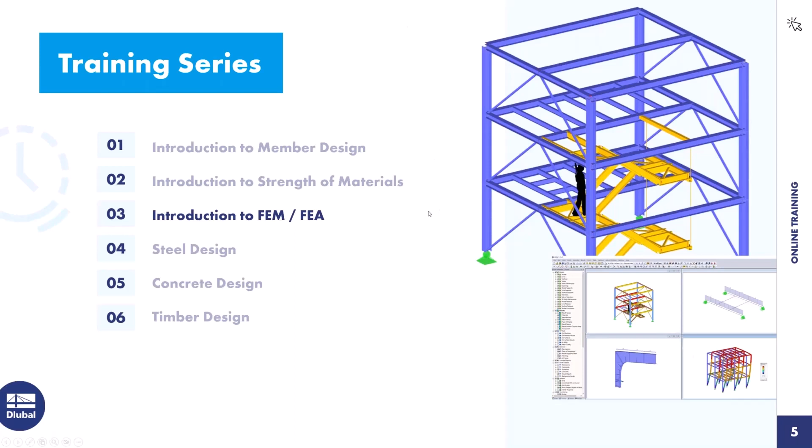In today's presentation or training, we will go through several different topics. First, I will just introduce you to the basic principles of the finite element analysis - a few slides on the basic principles so you can remember the stuff you may have already learned in your studies, and have a better background knowledge on the stuff we will do right here.

The next point will be just an introductory example with a continuous slab, followed by, again, just a short theory on the plate mechanics and the plate calculation theories.

With the last two topics, we will go on to the nonlinear calculations, so the more complex stuff. Not really hard into theory, but we will show you what RFEM is capable of. And the last thing we will inspect will be the singularities - one kind of big problem in the finite element analysis. And we will try to figure out how to solve them or at least minimize them.

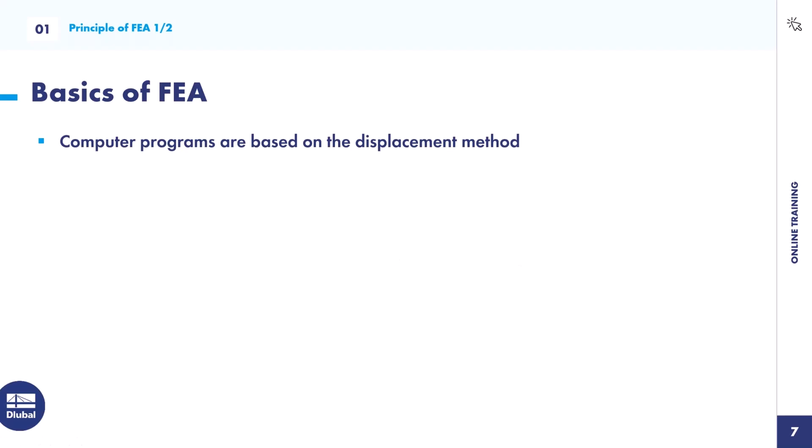The finite element analysis is used when analytical solutions of structures are not really possible. That means the finite element analysis uses a decomposition of the structure into finite elements. So it splits up the model into several squares or triangles, and on each square or triangle it describes the continuum.

This means at each border from one element to another element, you have, for example, a displacement in z direction, and it must be equal. So you have some equations which have to be satisfied. And for inside the element, we have approximations. So there are different approximations and several programs can use different approximations.

Also, there's the difference between linear approximations or third order approximations, which would be a more exact calculation, but also result in more demanding computer power. The next thing would be the discretization. This is an important term in the finite element analysis. The discretization means that the structure itself is decomposed into these finite elements, into these small elements.

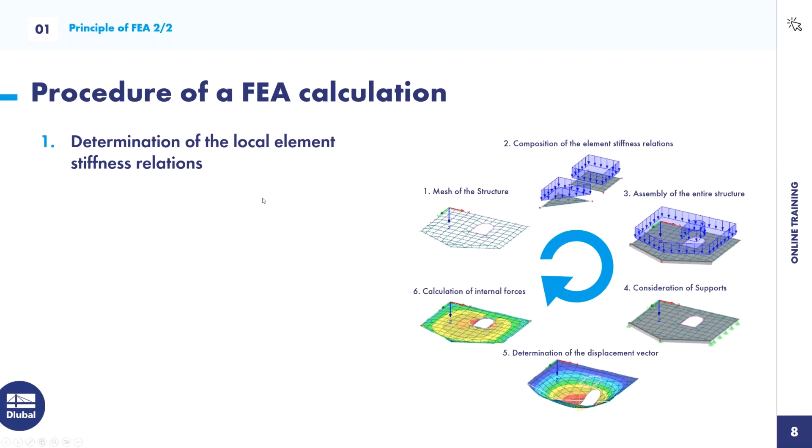And to make it a bit more clear, we have it also in a sketch where I will explain in 6 easy steps how a finite element analysis calculation is carried out. So the first step would be the discretization. That means we would split up the model, in this case a slab with an opening, into its small elements, and then in the second step we would construct the relations of each element. So the stiffness of each element, we would describe it with these approximation functions inside the program and have our stiffness matrix for every single element.

To continue and find the final result, we have to transform these local stiffness matrices. That means we have to transform them into the global coordinate system, and then we can put them all together. So we put several matrices together and create a complete stiffness matrix for our system. This is right here, the third step in our calculation.

In the next step, we would consider supports and loads. The finite element equation is relatively simple. It's the stiffness matrix K times the displacement vector U, and it equals the force vector F. So with step 3, we got the stiffness matrix K. With step 4 now, we will get our force vector F. And by considering the support conditions, we can also block or strike out some of the equations, since in the displacement vector we just set some displacements, for example, to 0.

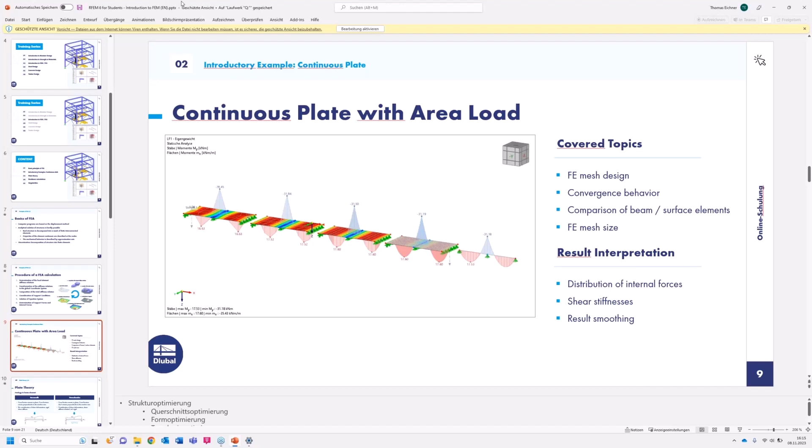And what we will do is we will create a continuous slab, and we will adjust the mesh size for the same slab, and we're gonna inspect how the mesh size will influence our results. Also, we will compare it to a simple beam, just one of the easiest structural systems. We will investigate and inspect the problems of the mesh size.

So now RFEM should be ready. Not quite yet. But okay. In the meantime, we can also do just another poll.

I prepared one according to the discretization. Let's go. What did I mean with the discretization in the finite element analysis? Okay, perfect. I will close the poll. And the result, it's quite surprising. I never had this before. So 100% of you were right. It's the decomposition of the structure into small finite elements. Perfect.

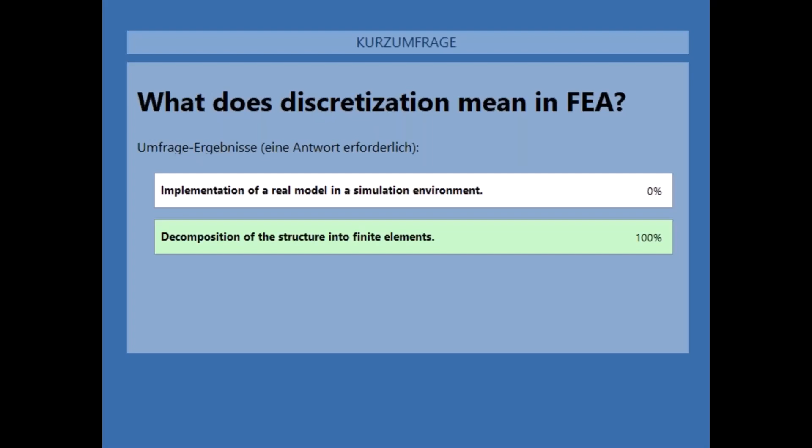Okay, seems like I had some pushover model open from my dynamic development. These are rather complex systems, and it could result in some loading time.

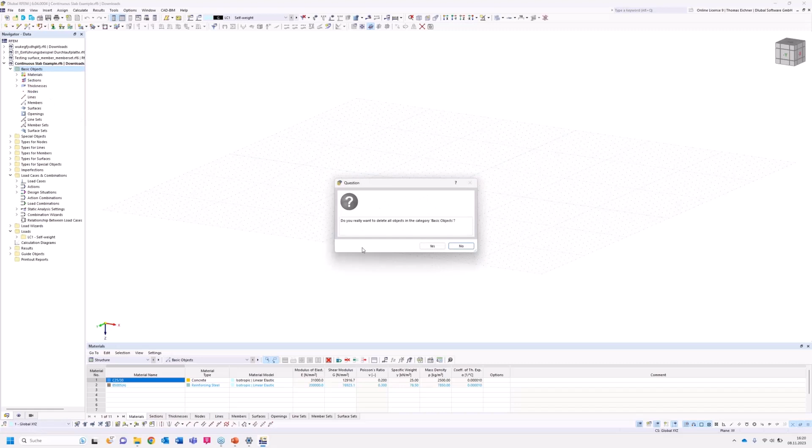Since we want to start from 0 today, and the basic program option is to use the materials, sections, and thicknesses from our last model, so we don't have to create them each time completely new, we're gonna just delete all the previous basic objects. And that's done right here at delete all basic objects.

So now we are at our free model, and we can either go over this view cube, or we can use these 4 buttons to change our view on the system. We will want to look in Z direction from above. That means we will press this Z direction button, and then we are ready to go.

We will start by creating a new rectangular surface. It's this button here on top. If you ever used something else, for example, a triangle surface, the triangle button will appear on top. That's just the last used modeling option. So we will go on to use this rectangular surface button.

Right here, we can go on and create our thickness. Just for your knowledge, if we don't have a thickness and try to press OK, it will warn us that we have to create a thickness. So the program won't let you do complete nonsense. It's gonna help you on each step of your modeling process. Now we're gonna click here, and it's gonna automatically start the dialog for the thickness.

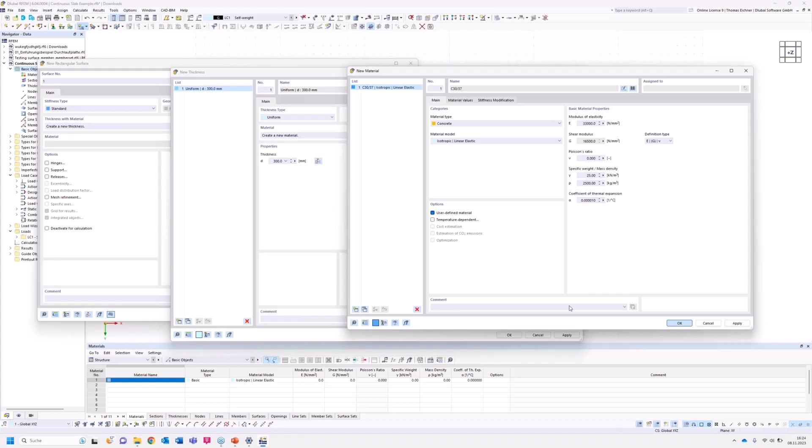After we did it, we have our material done. We can apply it with the OK button. We have our thickness done. We can apply it with the OK button. And then we can start by clicking the OK button again on modeling our first surface. The first surface will be about 10 times 5 meter. I have here my grid points to help me out, and I can just create this first surface.

The next point is we want to do a continuous slab. Means we want to have a support on the left side, on the right side, and in the middle of our plate. To create the support in the middle, we also have to add another line. We're going to use the new line function on the top right and just go from one middle to the other middle. The system automatically shows us where the middle point of a line or a slab is. So this makes it quite easy.

After we did it, we can go out with right click or apply it with right click, and then we just had to close our dialog box. Now we have our first system. We have the stiffness matrix already done in here, like in the K times U equals F equation. We already have the K done.

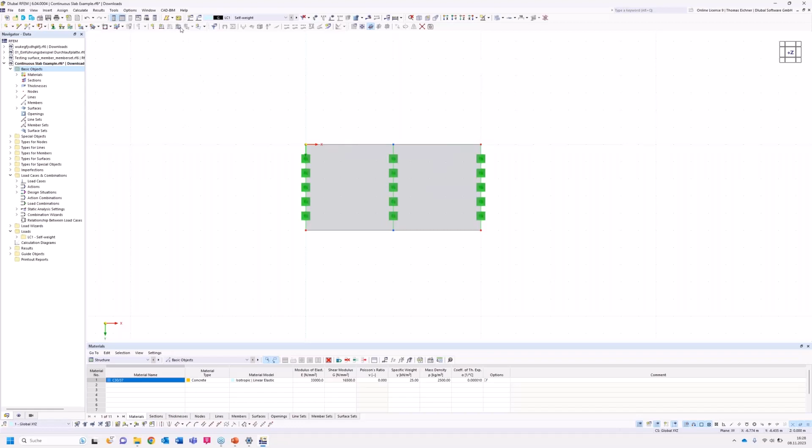And the last part would be the force vector. So for the force vector, we're going to make it simple and just apply an area load of 10 kilonewtons per square meter. We just have one load case, so we don't have to think about it right now. And we then can assign it here. We could just enter surface 1, since we only have one surface. We could select it, or we could just leave this empty, click OK, and select it afterwards.

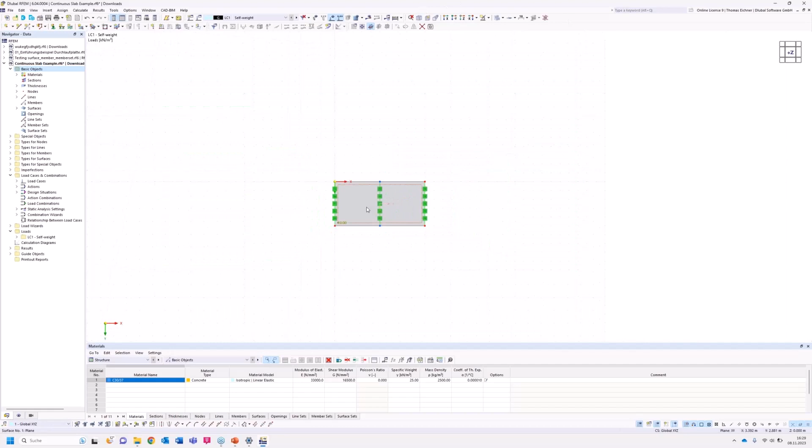After applying it, we're gonna inspect the appearance of the load. So back in the view from the top, we can see the system. And in the next step, we can just select everything we did and use this button here. This means it moves or copies the selected objects. In this mask, we already see on the right-hand side what will happen. The selected one will just be copied or moved to another place.

So we want to have 4 plates. So we create 3 copies of the system, and we will move them 10 meters. Right, 15 meters. Our system is 10 meters long, and so we want to have 5 meters space in between, and then we want to have the next system. So we will have 3 copies with 15 meters. After doing it, we will have them right here.

And now we see our helping grid is not helping anymore on the last surface, but I need it for the beam, or I don't need it, but it helps me a lot. So we will go into settings for our work plane and grid, and we will just adjust the number of grid points. I will just take way too many, like 200, and I will also adjust the grid spacing from 1 meter to 0.5 meter. It's not really needed, but it's possible, so I will just do it.

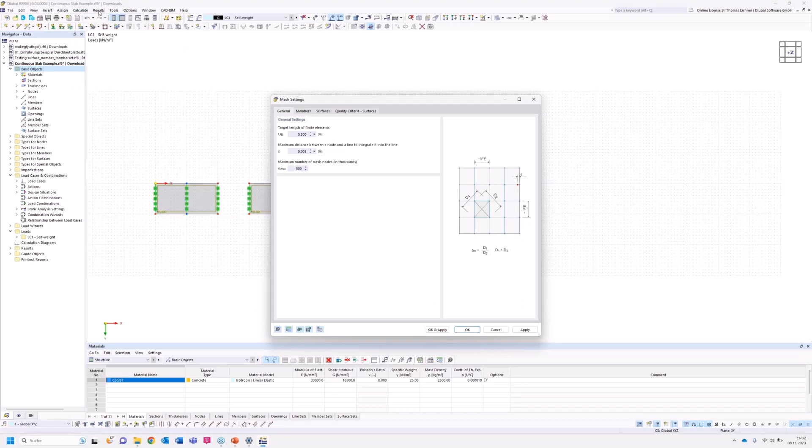With OK, we can see the result. We have now a new grid, and it's over the whole system we want to go through and inspect the results on. So the next thing we want to do before we model the beam would be the mesh size. Right now we don't have any specific mesh size for a surface. That means if we calculate it right now, it will just use the general mesh settings, which means our mesh size would be 0.5 meters on every surface.

Well, since we want to inspect it in way more detail and have different mesh sizes, we will help ourselves with something called surface mesh refinement. Like said in the name, surface mesh refinement seems to be a property of a surface. And our data navigator on the left side is built up very simply. There are basic objects, some special objects, then the properties of our basic objects, properties of our special objects, something about the loading. So in general, in the data navigator, you could find each function you also find in the buttons on top. But the buttons on top just help you to be way faster.

But right now we will go for the surface mesh refinement, right here: types for surfaces, surface mesh refinements, and use them. With double click, we can open the dialog and see the first one. In most dialogs, we also have a picture of what is happening within this dialog.

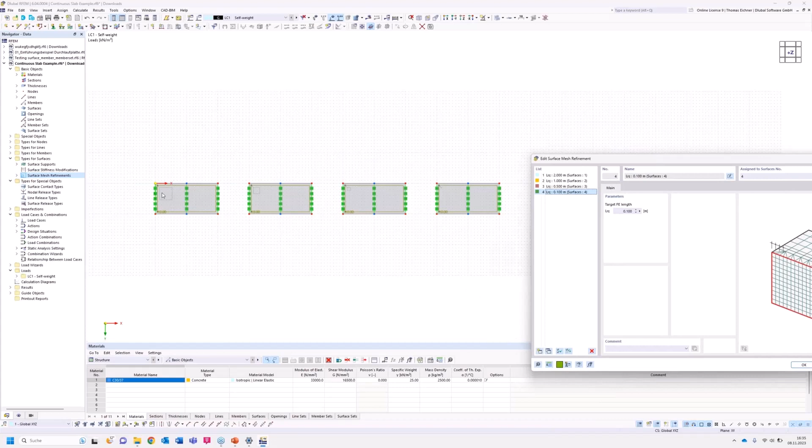Now, after finishing the 4th one, we didn't apply it yet. We can either apply it right here, so now we can see something. I will explain it in a bit. But the positive thing about the apply button is we stay in the dialog. So if we had more surfaces and wanted more mesh refinements, we could just go on and create new ones. If you click OK, the dialog will be closed and it will be applied. That would be possible for our case as well.

And now we can also see these squares in our surfaces. Those show us how the mesh size will be. This will be very coarse and this will be extremely fine. You could estimate this will be roughly 1,000 more elements than the first one. That means maybe not 1,000 times more calculation time, but let's say 5 times the calculation time. It's just an estimation.

For the comparison, we will also create our beam. The beam will be done with this button on the top left side. This section will be a new one since we have none yet, so we go into create new section. We want the only material we have already, the C30/37. And we want exactly this rectangular object. The rest here doesn't really matter for us right now. I will go on to something later on, but we could also inspect the section properties.

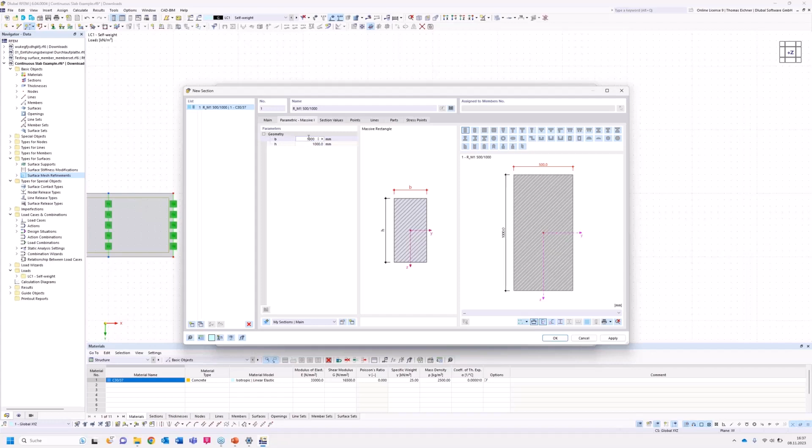To adjust the size of our rectangle, we can go to this parametric massive section. Here we want a width of 1 meter, so 1,000 millimeters, and a height of 30 centimeters. We make it 1 meter since the internal forces of plates are always, one second, I don't want to say something wrong, kilonewton meter per meter. So it's always for 1 meter. To have the same results for the beam as well as for the plate, we need 1 meter in the width. We can press OK and OK and go on with the modeling.

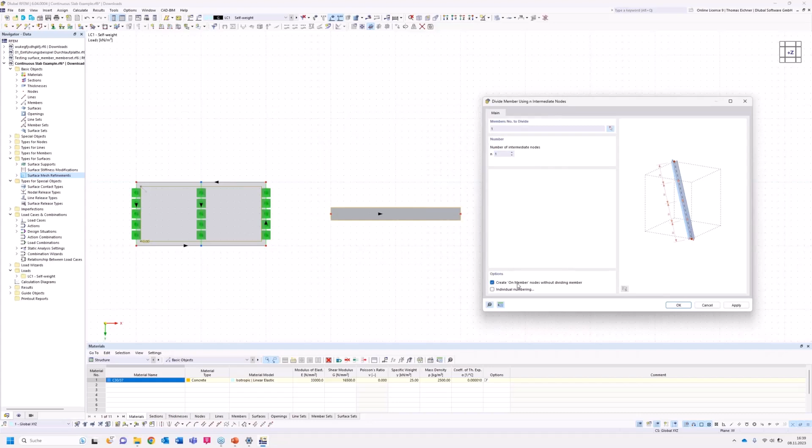Now we will create this 10-meter slab, well, not slab, but our beam. This beam will be divided since we need a support in the middle. We go on this member, divide member with intermediate nodes. I could also go by distance with 5 meters, but we will take the simpler method: one intermediate node, very easy. We will also use a new function here, create on-member node. I'm just clicking it and pressing OK. Now you see this blue new node.

The special thing about on-member nodes is we didn't divide the member. This is 1 member. If we didn't check this function, it would be 2 members now. It's just for more complex systems. You don't want hundreds of thousands of beams just because you have beams coming into other beams and so on. For our purpose, this doesn't really matter and we could go for both options. Now we have this beam. We have our K matrix again.

We can go for nodal supports now and add some supports to the system. One problem here is that we could use the predefined hinged one, but on the predefined hinged one there's 1 degree of freedom which we need to block for beams, and it's the torsion, the rotation about its own axis. If we didn't do it, it could just rotate and fall over.

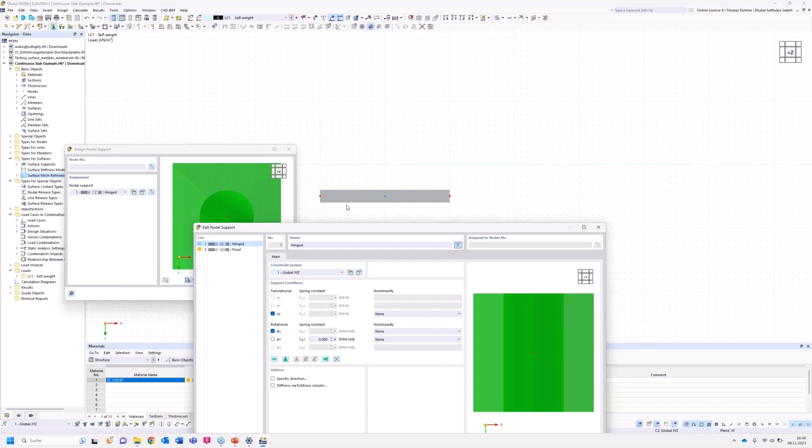So after doing this, we have it adjusted right here, press OK, and assign them to all the nodes. Last but not least, we can just add our member load, again with 10 kilonewtons, this time per meter. Press on the slab, again not the slab but the beam, and we're ready to look at this in 3D, since it looks quite cool now. Just a few simple steps and we have our systems.

One more thing, we can also do this for loads. We can adjust their size. And yeah, so before the calculation, I want to do 2 more things. That will be, again, view in its Z direction. And now we will create our, where is it? Our result section.

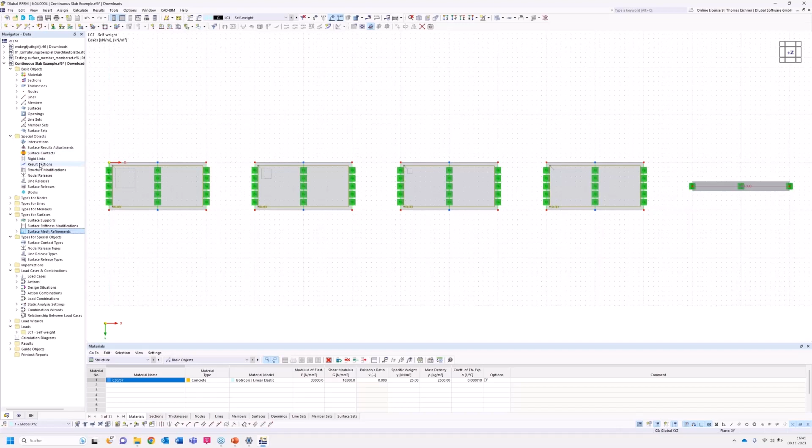Result section is a special object, so we find it in the special objects. Result section, we double click it, and we just use the basic settings and take our first 2 nodes from here, from the middle left to the middle right. Okay, we will press OK. Now we can see we have added this result section.

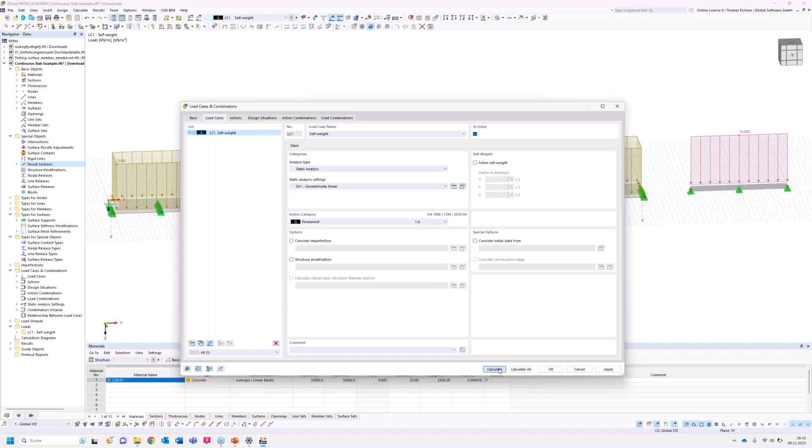Now for better investigation of our loads or of our results, we will also deactivate the self-weight. So we go into the load case and deactivate the self-weight. Now we're done and ready to calculate the system. So we have our results now. We have our results also on the result sections.

We can adjust our values to be displayed right here at the values on surfaces. And that seems to be wrong. We have to go result sections, values on result sections. There we can go on local extremes. And that means we just have our results. Now we can see the different shapes and we can compare the deformations.

We can see we have here 0.34 millimeters. And we have here on our comparison beam 0.46. So there's a big discrepancy between this coarse model and our beam. This 0.464 seems to be really accurate, but also our not so fine mesh did result in comparable deformations.

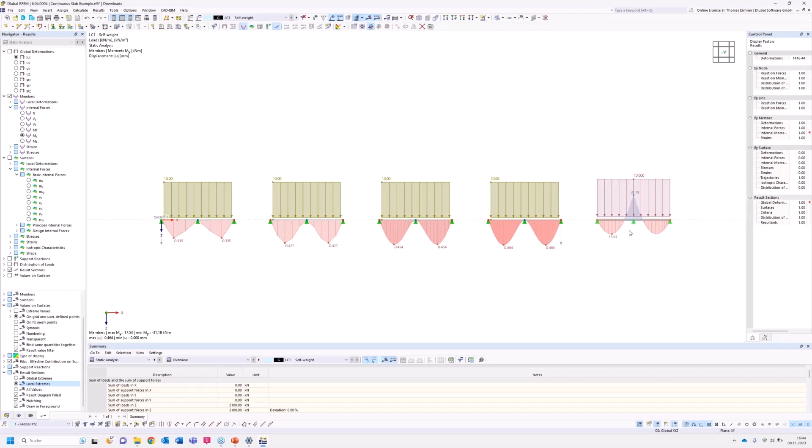We'll also investigate this on the internal forces. So we go on the members, the internal forces, and we will look at the moment about the Y direction. This is the moment rotating about the Y direction for beams. For surfaces, it won't be the My. The My should be 0, but we will go for the Mx. Why is it now the Mx and not the My?

For surfaces, there's a different definition for internal forces. Mx means now we will follow the x-axis. We will cut the slab with a plane perpendicular to the x-axis, and then we will rotate around the corner of the cut. So it's a cut perpendicular to the x direction, and then we will rotate around it.

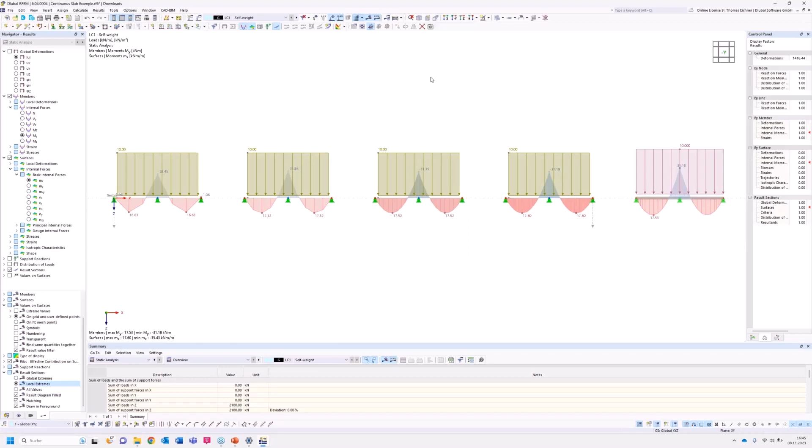Now we can look again into our result investigation. I will disable the loads for here. And now we can see, okay, there's a difference in those ones. Also, now I will go into the section result diagrams, right click on the section arrow, then go into result diagrams. And here we can see it already. Now I will, let's see.

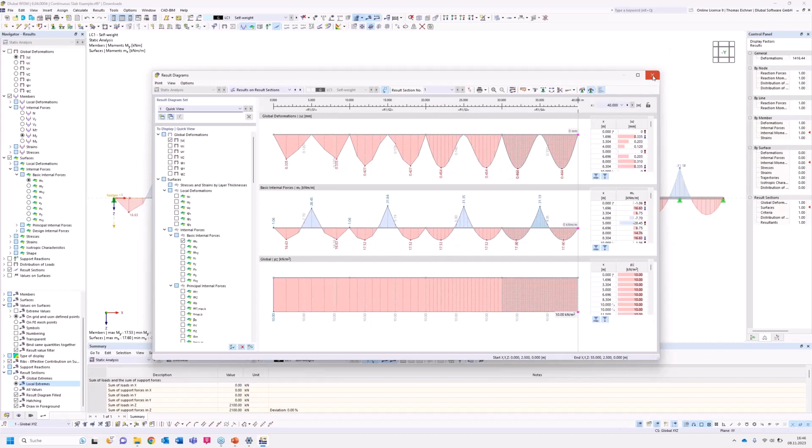What's now happening is that we have, I will show it in the general menu since I want to use the 3D. I will also disable the results for what I want to show you, since we can see now the mesh. The mesh seems to be fine for these right three types. But on the left side, we see it's not quite fitting in the system.

We have also a triangle. Just a hint, we want to avoid triangles. We can't avoid them always, but we want to avoid them. They won't lead to the best results. Not completely wrong results, but let's say not the best results.

And we also see we don't have an edge of elements now in the middle here. And for a single span beam, we would estimate the maximum moment in the middle. So for this system, let's go back into the results.

We can see that here is our maximum on the left side, but it's not exactly where it should be. So the mesh, if it's too coarse, doesn't only influence the exactness of the results, but also the location of maximums and minimums. And that's what needs to be avoided in any case.

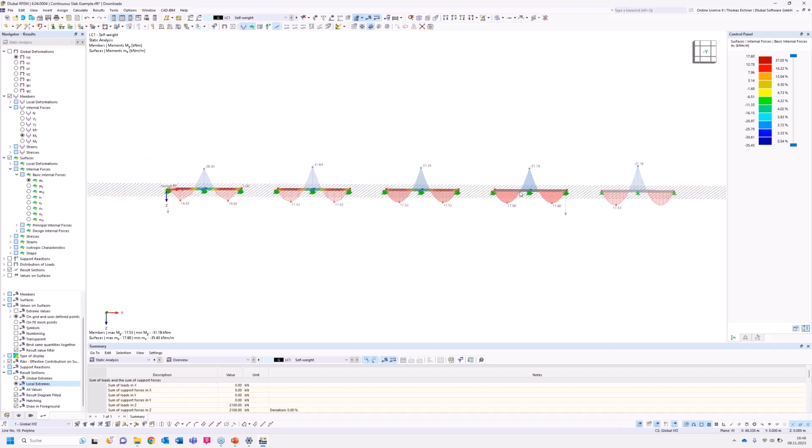So the next point would be which results seem fine. In this case, we will look at the top moment. We have almost the same results here. Seems fine, of course, since it's very fine. But the difference between this 31.35 and this 31.18 is not that much, so I would also take these results. These results I would take as well. They're really close, about 1% difference maybe.

But when I go into deformations again, it looks quite different, and that's why I would go for this system here. That leads to my rule of thumb, learned in my studies, for the use of mesh size.

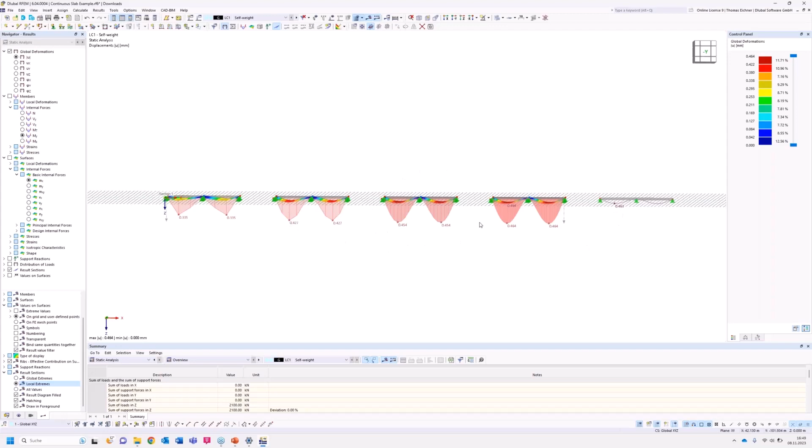So I'm going to show the mesh again. We have like 5 elements right here, and here we have quite more, way more. The rule of thumb I learned was 6 elements per length. So there needs to be 6 elements in the region we want to inspect.

That's for design. What I learned in this company is also that for bigger models, sometimes there's the possibility where you want to design parts of the model and use other parts just for load transfer. If parts of the model are just for load transfer, 4 elements are enough, maybe even 3. But however, this one should be avoided in any case.

Okay, so now we're finished with our first model already. And the next thing we will do would be some nonlinearity. So what I'm going to do at first is give you a short introduction into plate theory, and afterwards we will continue with this model with some nonlinearities.

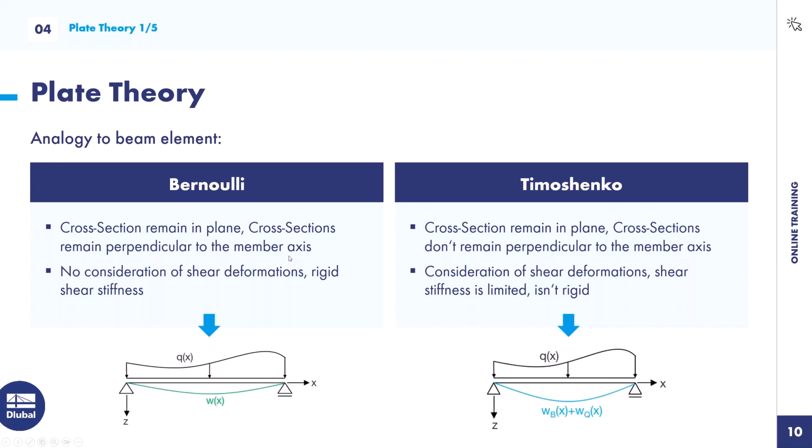For the plate theory, we have the analogy to the beam elements. For beam elements, we have on one hand the Bernoulli beam, on the other hand the Timoshenko beam. The simple difference is the Timoshenko beam also considers deformations from shear, so it isn't rigid. For the Bernoulli beam, the cross section remains in plane, same as for the Timoshenko beam, and the cross sections remain perpendicular to the member axis. This is not the case for the Timoshenko beam.

We can also look at it here. That means for Bernoulli, we have this middle axis perpendicular to the middle axis, the section cut. And for the Timoshenko beam, there's an additional shear angle, meaning the shear is also taken into account for the deformations. There's also kind of a rule: the bigger the beam, the better to use Timoshenko.

This can be used completely for the plate theory as well. We have the Kirchhoff plate theory and the more exact Reissner-Mindlin theory. We have for both systems the linear elastic material law from Hooke. We have geometrical linear and small deformations. We have that the cross sections remain flat and there won't appear any warping. We have a constant thickness. But for Kirchhoff, we don't consider the shear deformations, and for Reissner-Mindlin, we will consider the shear deformation.

For plates, we also consider the transversal and lateral strains. That was the Poisson's ratio in the program. We set it to 0 to have a better comparison to the beam element. We could have also just taken the Kirchhoff theory.

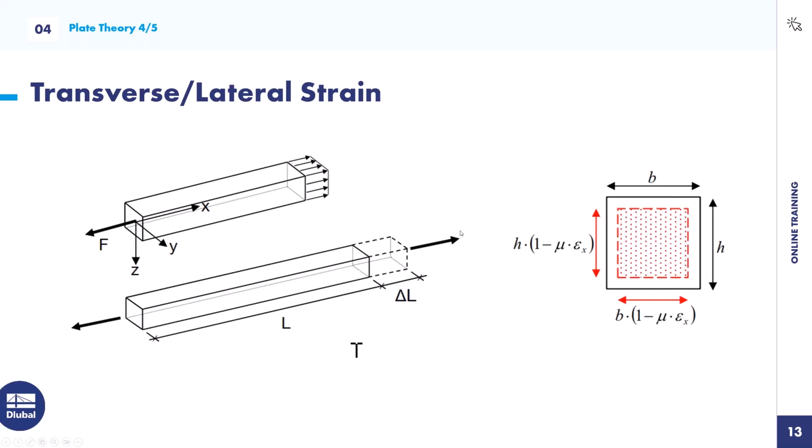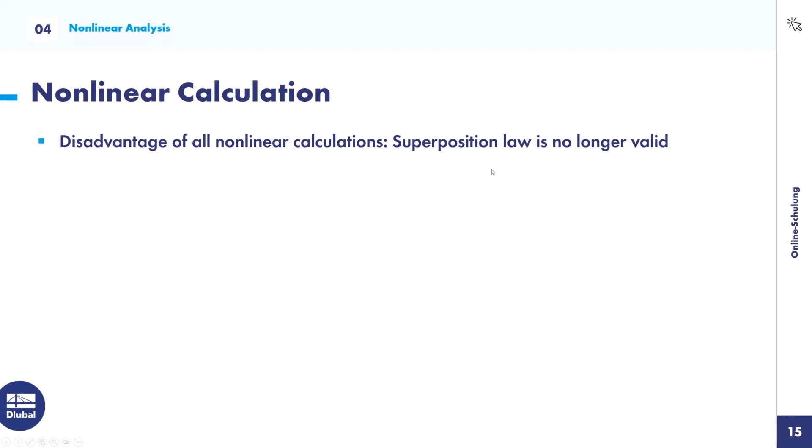Next point would be nonlinear calculation. Nonlinear calculation means something is nonlinear, right? The problem with nonlinear calculation is we can't superpose stuff. For example, in our early studies in statics or mechanics, we had just a dead load case and a live load case, and we just separately calculated them, then summed up the results and it's finished. This is not possible for nonlinear calculation.

The typical application areas in RFEM 6, or in general, are on one hand geometrical nonlinear calculation. In German it's first order and second order, and in English it's geometrically linear and p-delta calculation. There's also the theory of large deformations, which would be third order, but anyway we will go for this one.

So for second order, the program needs to do its first iteration of calculation. It calculates the system with its forces on top, calculates deformations, and then goes into a second iteration. It uses the deformed system, applies the loads again, and repeats the same process. This only stops if the added deformation is smaller than an error definition.

Okay, that's for the geometrically nonlinear stuff. Then there's also the nonlinear material behavior. Maybe you know nonlinear elastic material models. There are also plastic material models. And you can just imagine the superposition with a nonlinear material.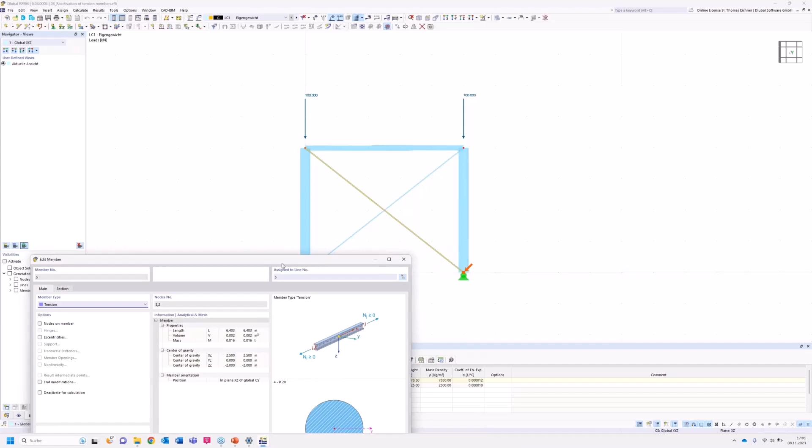So in our system, we have just this frame loaded with 2 times 100 kilonewton. And we can imagine what's going to happen right now. I will go for theory of first order first and calculate the system.

Theory first order won't have any horizontal forces, so as estimated it won't have any deformation in x direction, but it will just be pressured down. We can also see the color of these members: they got gray, which means they failed, they deactivated, so they're just not there anymore, you could say. For this theory first order, it was no problem since they are not even needed.

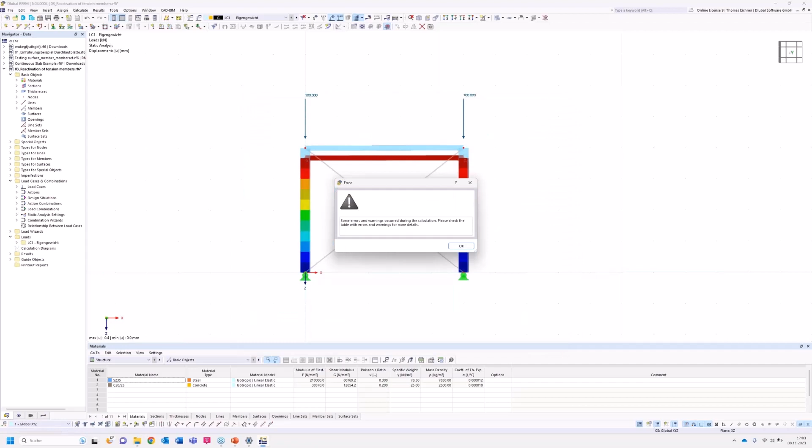Now we will switch to theory second order. I will just look into it, okay perfect, that's everything okay, and we will calculate it. So for theory second order, there will be some imperfections implemented in the program itself, meaning it will deform it a bit to the side and start the calculation.

Problem is, we now have an unstable structure. It's movable in the x direction. Why? Well, those both objects just failed. They got pressured and failed out.

In reality though, if the system goes down and then to the side, I'm not sure in which direction it will go, but let's say it would go to the left side. Then there will be a point where this member reactivates again and holds it back, right? And that's what I want to show you.

Even though there could be problems with stability, there can be a solution in our static analysis settings, and that means we could go for this reactivation tab. Exceptional handling, and then we will go for the failing members to be removed individually during successive iterations, so they can't fail at the same time in an iteration. We will go for it and calculate the system again.

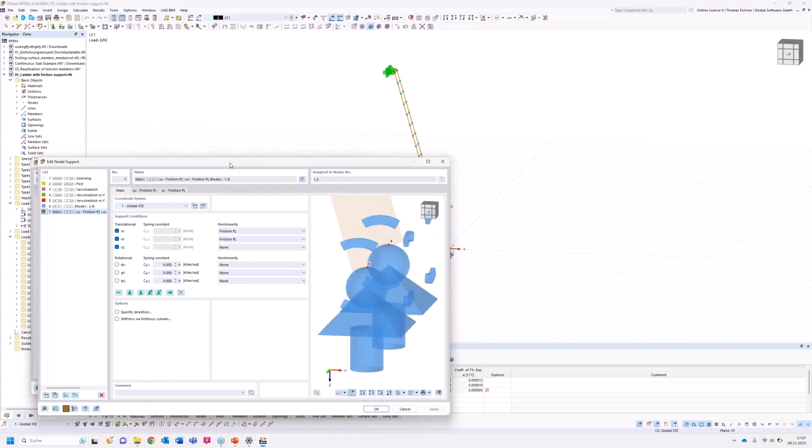Now we can see we have for this translational degree of freedom the friction entered. The friction appears here as a new one - could also go here, friction Pz, and it adds on top. We'll deactivate again and go into UX friction, which means in X direction it can take a force 20% as high as the PZ force.

So when we go into the system, we can see I create some load cases where a person of 1 kilonewton, so round about 100 kilograms, will go from the ladder to the top.

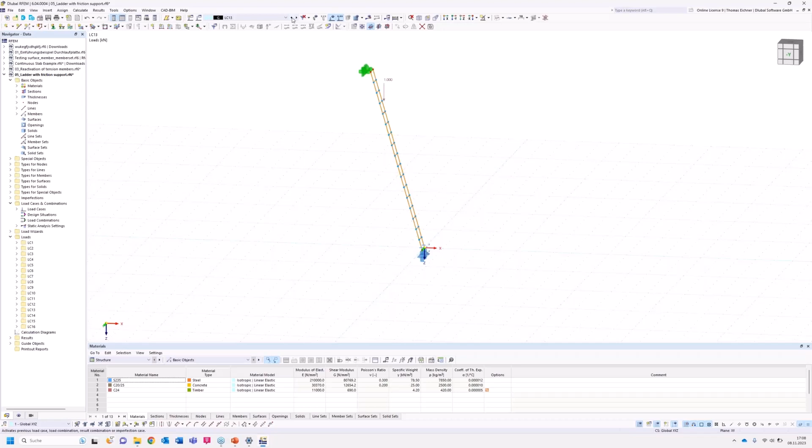Now we can calculate the system for a second, and I need to calculate all load cases here.

I will also show the support reactions. Now we can see the deformations of the ladder - they don't really matter for us right now. What matters is the support reactions.

We have here per support 0.5 kilonewton, meaning 20% of this 0.5 would be 0.1. So the support can take 0.1 kilonewton in X direction. Since the vertical force won't change, the limit value won't change.

But when we step up the ladder now, we can see this value rising. This results from the equilibrium of moments - as we go away from the start, the distance of this moment will be higher, and therefore this force will go higher. Way simplified.

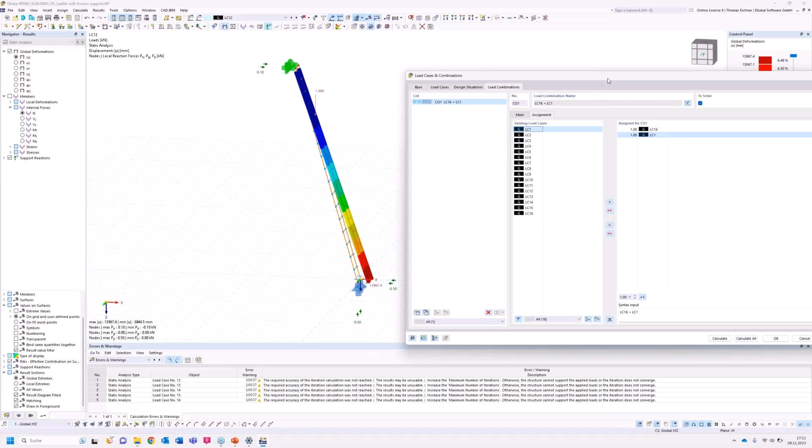So if the person is standing on the top ladder, I want to see why it is said that if someone stays on the bottom, on the last step here, or on the first step here, why is this helpful? That's something we can always also investigate. Therefore, I just need to, okay.

And now we calculated it and we can see, yeah, he can stand on top. Why? We have now double the force in vertical direction per support, meaning also double the allowable force due to friction. That's why it always helps when someone stays at the first step if the other one is going higher.

So then we can go into our next model.

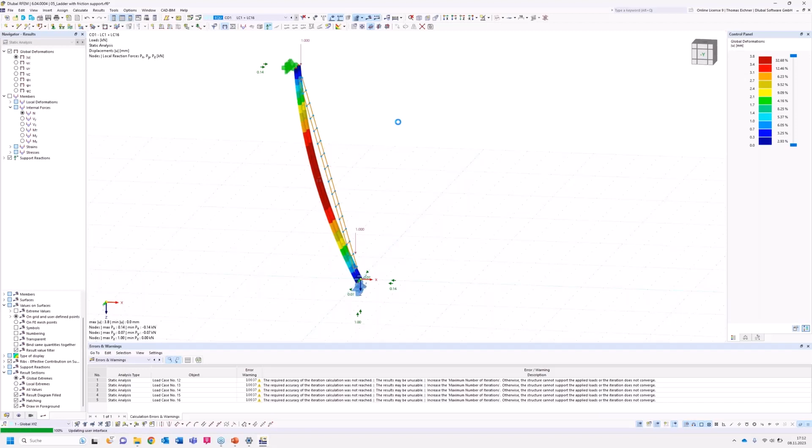And that would be our tension specimen. So we're in a testing bureau. We have, in this case, a surface, a steel surface. It's fixed on the one hand side. On the other hand side, we will pull it. We will just pull it.

Okay, now we're done. What I did here, we have steel 235. We have a thickness of, I think, 3 millimeters. We have a height here in between of 8 millimeters and here of 10 millimeters. That's why I created a force which results in exactly the yielding force for this section part, for this 8 millimeters height.

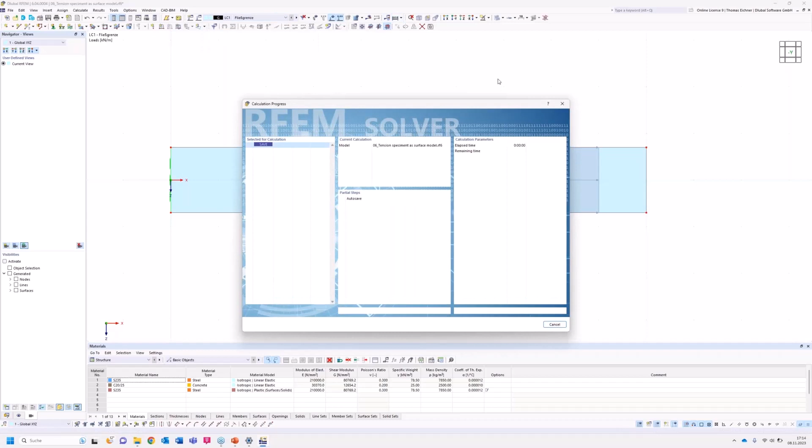So this 503.572 kilonewton per meter results in a stress of the surface of 235 Newton per square millimeters. So the limit of the system. I also created another load case where I just increased the load a bit, just a bit, but it should be more than 235 here then. And that's what we're gonna investigate now. Gonna calculate the system again.

Okay, now we have the results. At first, we're going to look at the deformations. You have here 0.1 millimeter, as well as for this increased load, we have 0.1 millimeters. Go back into this limit case. And now we will go into our equivalent stresses. Our equivalent stresses should be somewhere here. We will use the standard formulation in form of the equivalent von Mises stresses and show them.

Now we will see some colors. Okay, but we don't know what the color means here right now. Therefore, we go into our control panel. Now we can see the stresses and what each color means. So we see red and orange could be in this yielding region, about 235. But for some better investigation, we can also use user-defined values, and I will go just for the upper limit, 235.

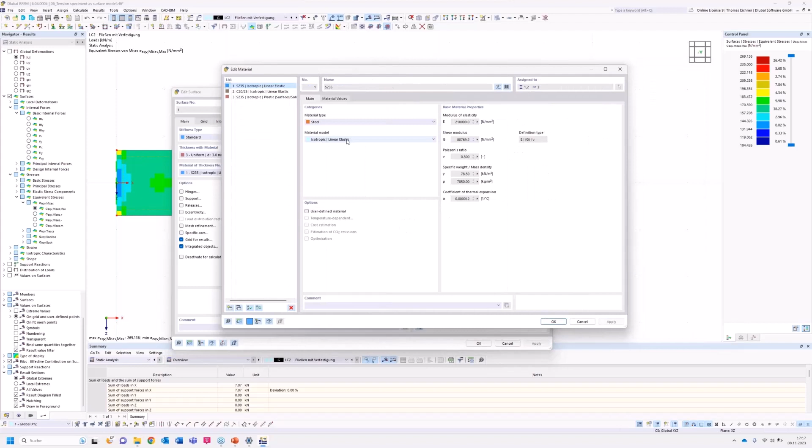And right now we will use the nonlinear material behavior. So I checked it already, and by checking it, it will be integrated in the program automatically. And that's the reason why we can pick here now a ton of new material models. In our case, we will go for plastic material model for surfaces, for example, isotropic plastic surfaces. The most complex thing is the isotropic damage surface model. There you can just define the model however you want.

So we go here for the plastic surface solids model. And within this, I will explain what we did before. Before we had the linear elastic model. Means we had this E modulus, and this line just went up linearly to infinity with the same tangent. But now we change it to this plastic model, which means we have a yielding point implemented and a post-yield stiffness or strain hardening afterwards.

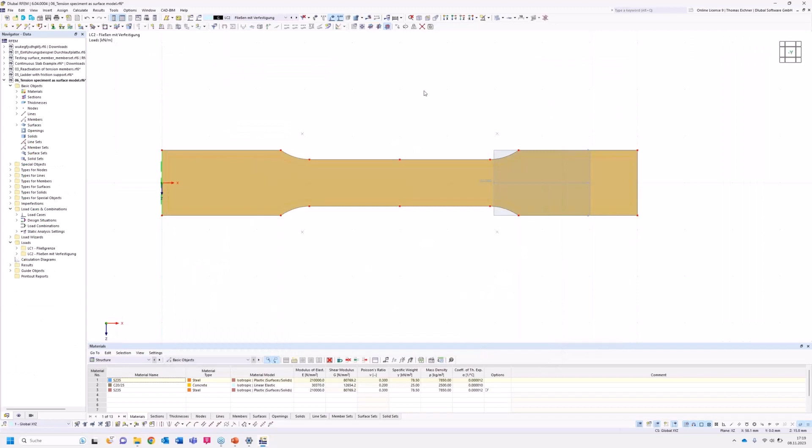This should result in redistributing the forces. So if an element would get, like in a linear elastic one, a force of here, this force should redistribute to another element. And that's what we're gonna use now. We have it now and we will calculate it. You can also see there were more iterations necessary.

But the point is, now you see here the upper limit, nothing exceeded the 235. Just a little bit here. I think we could change it if we would adjust the mesh size. But now it is as expected. This whole system is at its limit, and it would yield now. Only 1% are over the material limits, which means, I will just go into the material again, they are in this region, so they can do more, but they need to have more deformation for it.

And that means if we now go into this one, okay, before I do it, I will just show you the deformations again. Just remember we had for the linear elastic model 0.1 millimeter in both cases, and now we also have in the first case for the nonlinear model 0.1 millimeters. But what's happening now? We go to the bigger force, and we can see now 8.2 millimeters. Means like 82 times the deformation we had before.

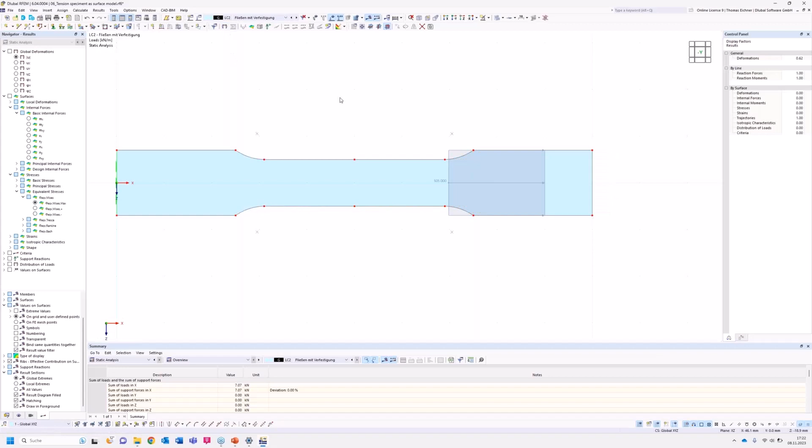So now, in this one, we can go here again and look at our yielding, at our equivalent stresses again. And now we see, okay, now we also have 24%, which are over our yielding limit. But they are not much over the yielding limit. It means the force redistributes over the whole height of the system.

Okay, so that's it for the nonlinear behavior. And now we can do another short poll. Choose suitable examples for nonlinear calculations. This is a multiple answer question, so please do not only pick one.

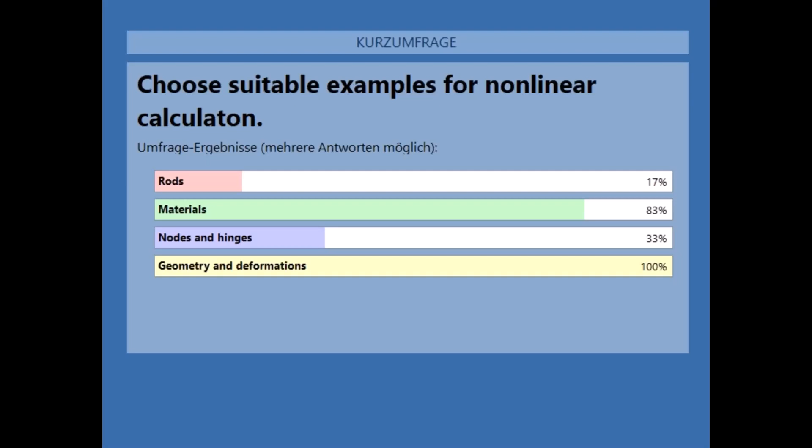Okay, some did vote. So I will close this one and show the results. Okay, just as a hint, every answer was right. So all 4 answers were right. Everything can have nonlinearities. Rods can have nonlinearities, materials, nodes and hinges and supports, and the geometry with this P-delta effect. Okay.

So what we're going to continue with now is the last part, just a short part of about 10 more minutes. It's the main problem of finite element calculations. And what is this? It's the so-called singularities. Singularities are a big problem since they are a discontinuity in the calculation model. So it's not a physical and real problem, but a mathematical problem. That means the results are just useless, kind of.

And this can be imagined, for example, at a point load. If you have a point load and you want to look at the stresses in the surface, and you go directly under the load, you have no area to distribute the force on. That means you have infinite stresses. And the further you go away from this central point, the stresses decrease.

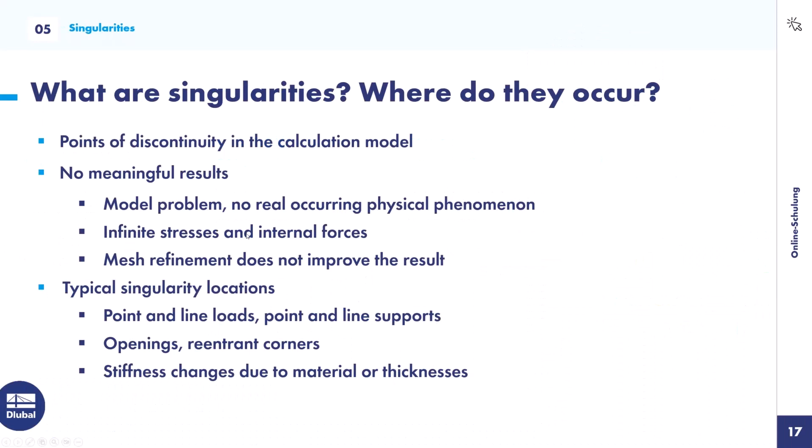Some typical locations are point loads or point supports, nodal supports, line supports, ends of line supports, also openings and corners of walls, also ends of walls since they act as line supports, and jumps in stiffness, for example, due to material or thickness. That's all already for the singularities.

Now I will just go into the model and go over one last example. Now I will model this and show you how to speed up your modeling first, and then I will show you how to deal with singularities. So we have here right now a surface with C20/25, a thickness of 300 millimeters. That's okay, those are the previous ones from the last one.

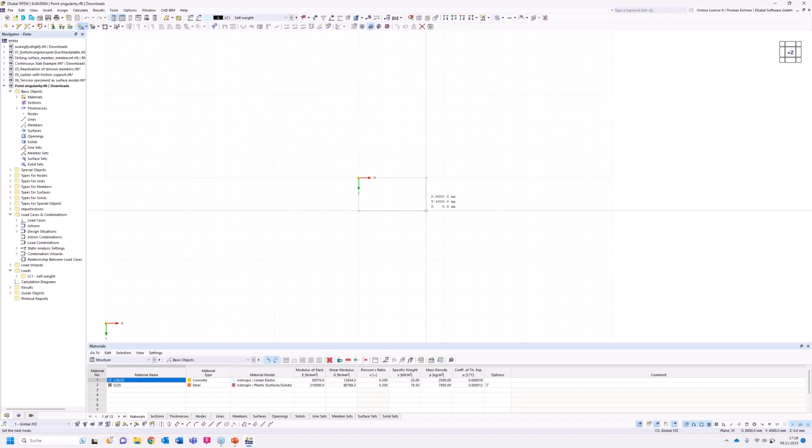Then we go for, what do we do now? One second, I had something in mind for it. Eight times 6 meters. Exactly, that's what we do. Next step, we will add

Okay, seems like Thomas's presentation was interrupted. So maybe I can sum it up for now. And yeah, I don't know if I have the right to share my screen. I guess. Yeah.

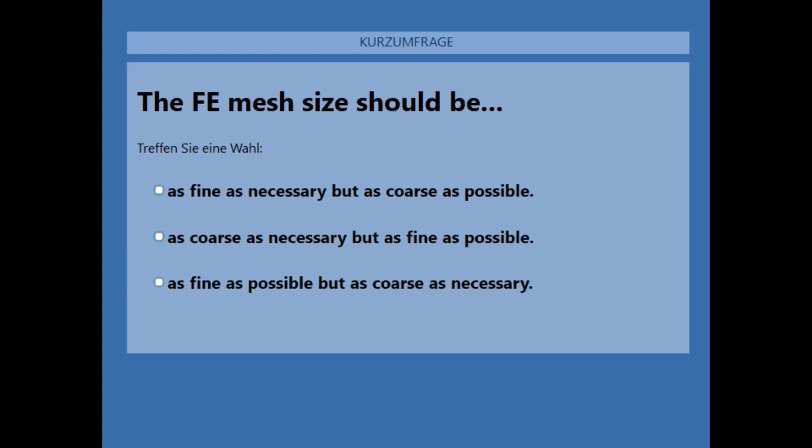Okay, perfect. Now I see there are some answers. And now I can show the result. So 75% picked B. Well, but it would be answer A. So as fine as necessary, but as coarse as possible.

The mesh should be as fine as necessary, since if it gets finer, it's computationally demanding. But it should be as coarse as possible, since, okay, the other way around. It should be as fine as necessary to achieve exact enough results, but it should also be as coarse as possible to have the least amount of calculation time for it. Okay.

So now the last two models shouldn't take too long. If you want to, you can start, and I will create them from zero again. If you want to, you can model along. So let's start by deleting all the basic objects again. And then we're going to start on the left side by creating our material first. So I'm going to double click it and create our concrete of grade C30/37.

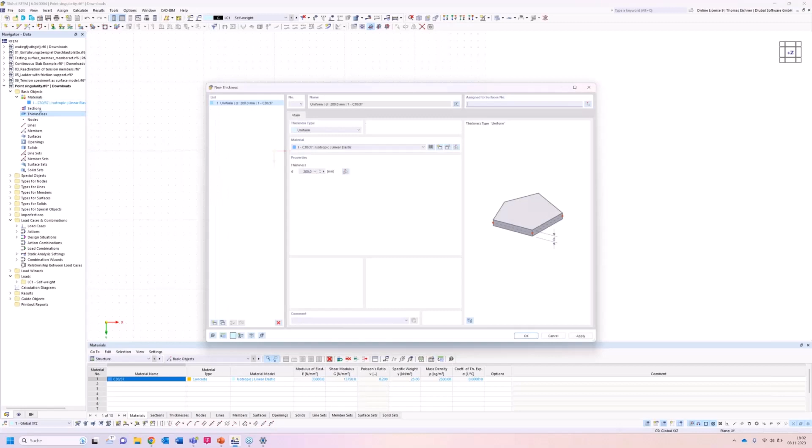Now I will use a Poisson's ratio of 0.2, so I won't adjust this, and confirm with OK. So now we see we have one material. The color of the material is blue right now. This means the material is not used in our model. In the next step, we will create our thickness for the plates. This would be, again, 350 millimeters with this C30/37. So now we also have a thickness. The thickness is now blue because it's not used. And the material now got the black color since it is used for our thickness here.

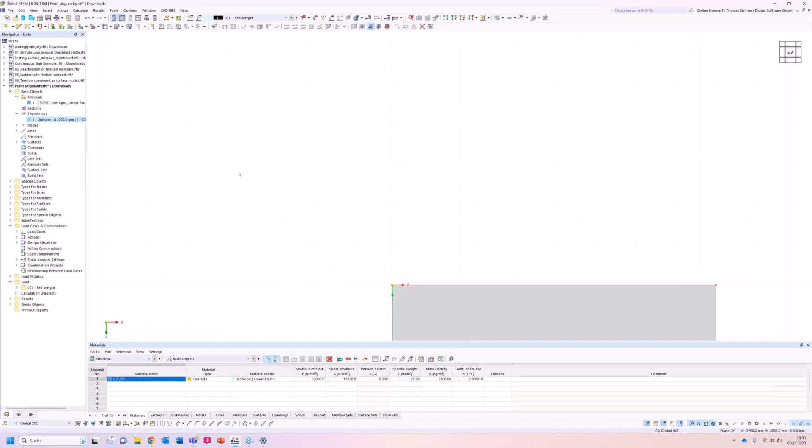In the next step, we will create our first surface. We will do it again with the rectangular surface, and we'll go for 8 times 6 meters. Okay, so we have our surface right here. By the way, by double clicking the middle mouse button, you will center on the whole model. Next, we want to set a point in the middle of our surface. We just create a node in the middle of the surface. And that's the point where our load is applied.

So we go to nodal load and set here like 10 kilonewtons. Or let's say 100 kilonewtons, to make the results more obvious. We will do 100 kilonewtons. And we are going to set it on our newly made node in the middle.

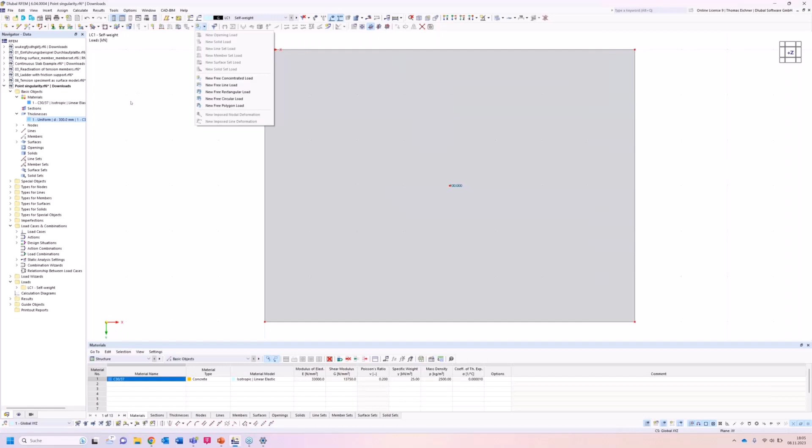There would also be another possibility with free loads, but I will show a free load later on in the next model. And it's kind of the same amount of work to get to the load in the end. So we're good with just this procedure. Next we just do easy line supports on each edge. Therefore, we use our predefined line support hinged and select all those edges.

Okay, so we're done with the surface. And in the next step, we would use, like in the first model, the option to copy the selected objects.

We want to do again one inspection for the mesh refinements in the end. So we want to have 4 surfaces with 4 different mesh refinements. That means now we had 8 meters in length, so I will displace them by 10 meters. And the amount of surfaces I want to create is 3. Input those values and click apply.

And now I see I did something wrong. So I will go back, press Steuerung Z and do it again. What I know is I worked with our specimen model before, and there we had everything in millimeters. That's why we have millimeters right here.

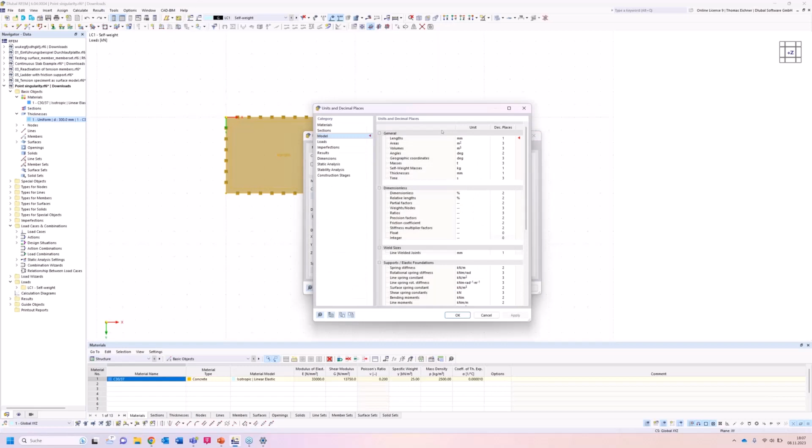But everywhere there's an input of length or forces or whatsoever, we have this button here below. It's our units button. And with this units button, we can change our lengths and say, okay, I want to enter them as meter. We could also adjust the result exactness, so how many decimal places would be in there. But it's not of concern for us right now. So we will press OK. And now we have the right unit here.

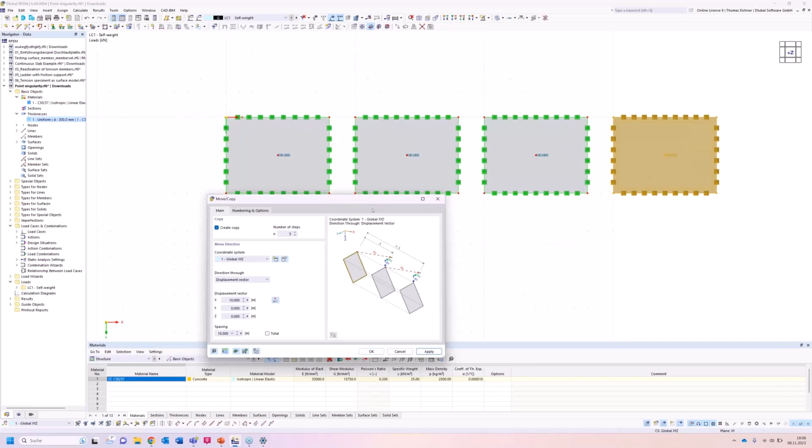Now we can take 10 meters 3 times, click apply, and we're ready to go. Now we see I did press apply, so we stay in this. If I would press apply again, I would get 3 more slabs on the right. Also, if I press OK, I would also get 3 more slabs on top. So this time, I will go for the cancel button, since I don't want any more slabs.

Now I see again my grid is not around the whole model. That's why I will go into these adjustments for the work plane again. And since I'm not gonna model any more things, I will just go for dynamically according to size. And we will see what it's gonna do to our grid. Perfect. It's just gonna adjust the grid perfectly to our model.

Now there are 3 more steps. The first step is the mesh refinements, same as in the first model. The second step will be the section, so this special object of result section through the surfaces. And the third step will be the deactivation of the self weight.

So we will start with our surface properties. We go into types for surfaces, and there we go into surface mesh refinements. With this done, we can just go for 4 new mesh refinements, the same ones as in the first model. And we will assign them. Okay, now I'm at surface mesh refinement 4, so I want it to be at the 4th surface. Perfect. And then I can start from top to bottom, because it's a bit more obvious.

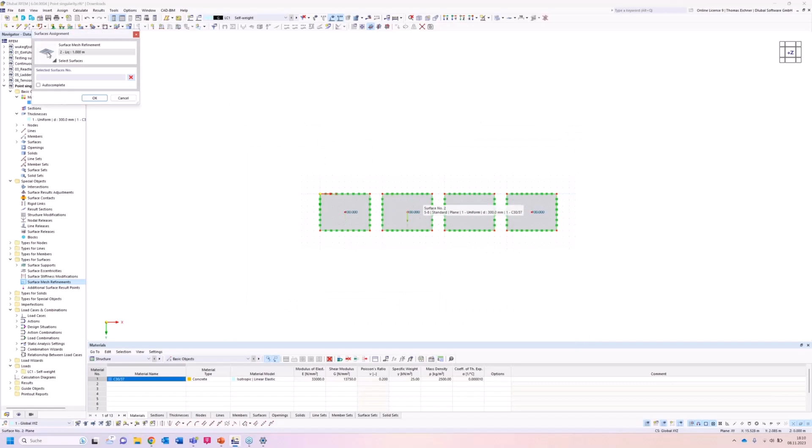Okay, so every surface refinement is assigned. We can click OK and inspect the size again. Since we did that already, I will just go on with our result section. So we go for a special object, a result section, and create it via double click. We can select the leftmost middle point and the rightmost middle point, and just click OK, since our basic settings are okay.

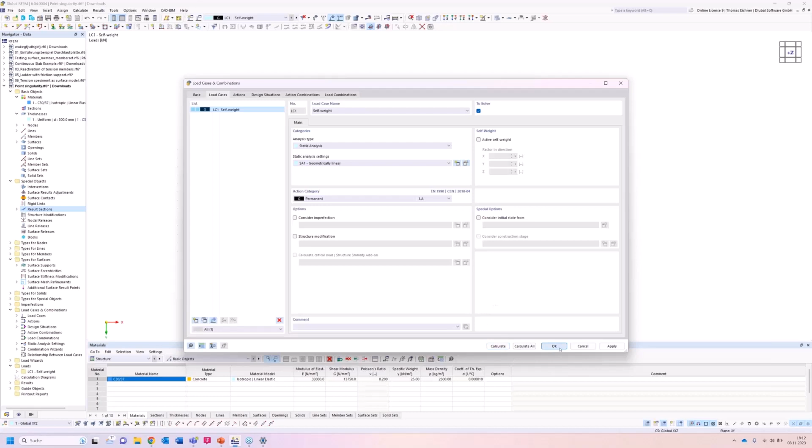So now the model is completed, and the only more thing I want to do is to deactivate the self weight in our load case. This is done. We could press calculate again here, but I will just go for OK. And then there are different possibilities for the calculation. One would be the calculate button. You could also choose, if there were different load cases, to just calculate one load case. And the other possibility is just to select show results. Since there are no results, it will start the calculation to show you the results.

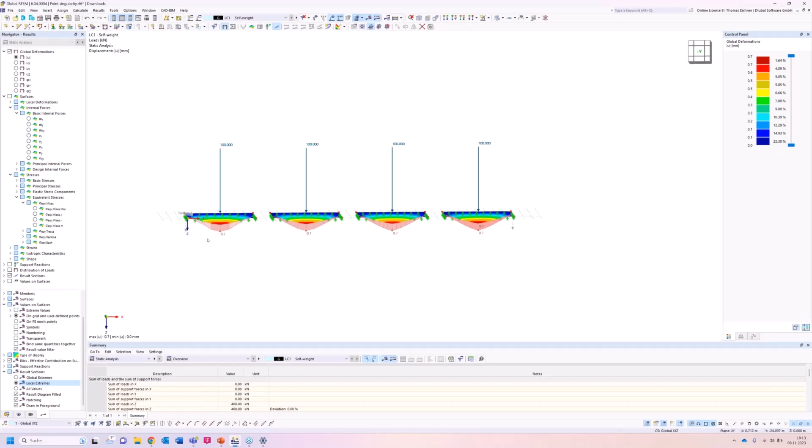Okay, so now we're in the model again. For the deformations, it doesn't look that bad. I will show every deformation value. So this seems not to be an issue for deformations. But when we switch into our basic internal forces, and I go for the mx again, so I cut, like for example here, and then a moment around the edge, we can inspect something disturbing.

Now we see it's not the best result, but let's say that the most coarse refinement will lead us to the lowest result. Means if you design now for this value of 37, you could be underestimating the internal forces. And we can inspect 37 to 61. There's almost like a factor of 2 between those. So that's a real problem, since how should we know how much reinforcement we should put in that area? How should we know how to design this singularity?

And now there are some tools for engineers to help yourself. For example, you could just say, yeah, this is a singularity and this won't happen. Sometimes it works that way.

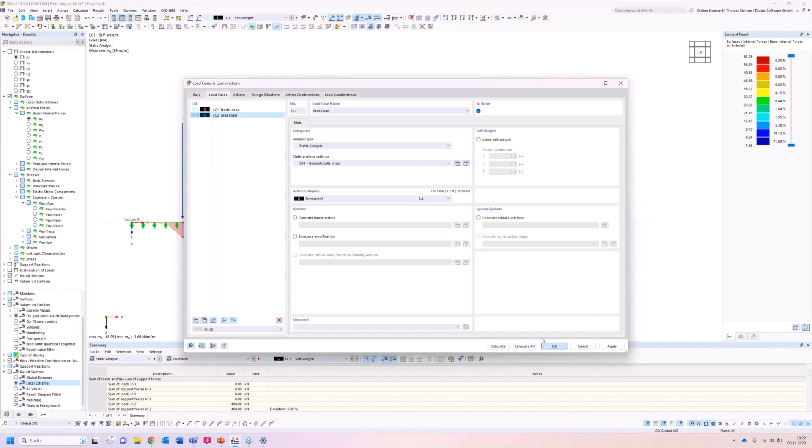The next possibility is, like I said, we have a column on top, so it should be an area which loads the surface, the slab. So what we can do is create a new load case. I will just rename this in nodal load and copy it. And then I will now make an area load with the dimensions of our column. Therefore, I will just delete these forces we have already. Go into our top view again.

And now we have to use the free loads. So we will go for a free rectangular load. The positive thing about those free loads is you just need a surface to assign it on, and you don't need objects to create this load. So we can go for the center and the sides of the rectangle since we know the center already. We could put in our x and y coordinates by hand, or we could just pick this node, and that's way easier. So we don't need a node, but it helps.

And the next point would be to define the edges of our column. It's 0.5 by 0.5 in this case.

And then we will adjust the load. So we had 100 kilonewton point load, and now we want 100 kilonewton on 0.5 times 0.5 square meters. That means 100 times 2 times 2, so we have 400 kilonewton per square meter on this 0.25 square meter area. We press OK.

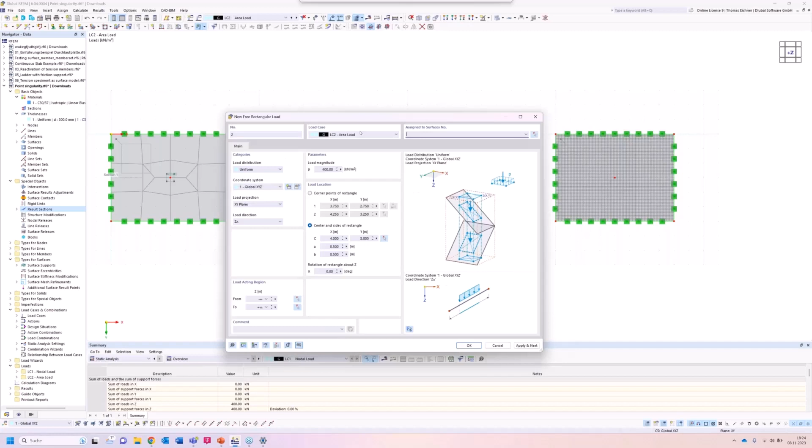And select our surface. It's this one, and press OK, and it's done. So now we see we are back in our program, out of the force dialog, and we need to open it again. That was a few clicks too many.

What we can do also is pick the second surface here in the dialog, press OK. So this was not with the OK at the bottom, but with this top assigning. Then we can select our new middle point, this one, and then click Apply and Next. That means this area force is made and we stay in the dialog.

So we can just go on with the other two surfaces without having to click two more times. It's always changing this surface assignment, picking the new middle point, and apply and next. The same thing one last time.

Now we can press OK since we don't have any more surfaces to load. Now we have our surface load. You can also see it right here. And we can create the calculation, or start the calculation.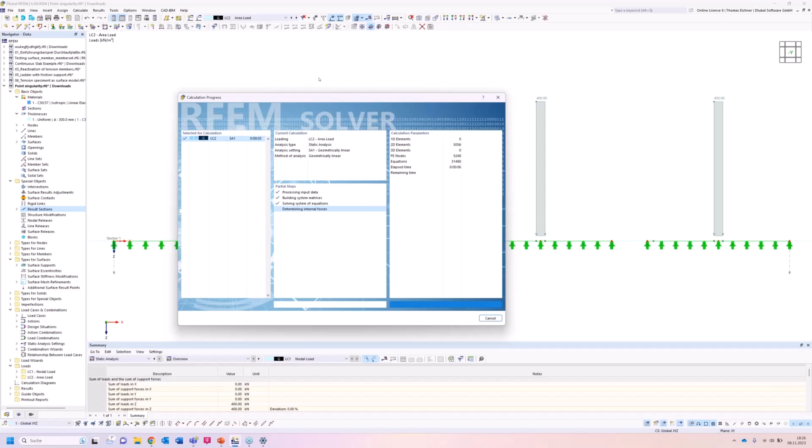Now we can see the results are way better, right? So we have this 33 kilonewton meters per meter, and the only black sheep kind of is this on the right. You can see 27.

I won't do this right now, but if you inspect this curve, you can also see we have more of a triangle right here. But right here we have a parabola. And the surface under a parabola is more than the surface under a triangle like this.

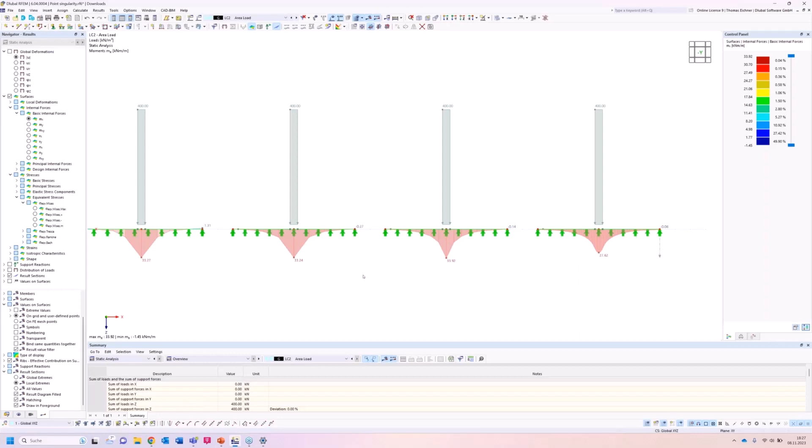So if we would do the smoothing of results again here, this would be more equal to each other. So a combination of both is also possible for special cases, but it always depends on the effort you want to put into singularities and how much of a problem you see in the singularity.

Okay, so this is it for point loads, and now we will get into our last model we can model together, and that's gonna be a singularity at nodal supports. So we will go for a new name, singularity nodal support. Press OK.

I will go now for the 3D model. I forgot it, but we'll just go for 3D model, it's okay. And we're gonna do almost the same model. Again 4 surfaces. This time let's see if we have thickness already with the right thickness. Yes, it seems right, so we don't have to create it new. We can just take the one from the last model and create our first surface.

Okay, this time I wanna now—okay, I will go out of this dialog again. I want to go into this Z view via the cube. So I will go on this cube and press this plus Z. You can also throw around your cube however you want, but we will stay in the Z plus direction.

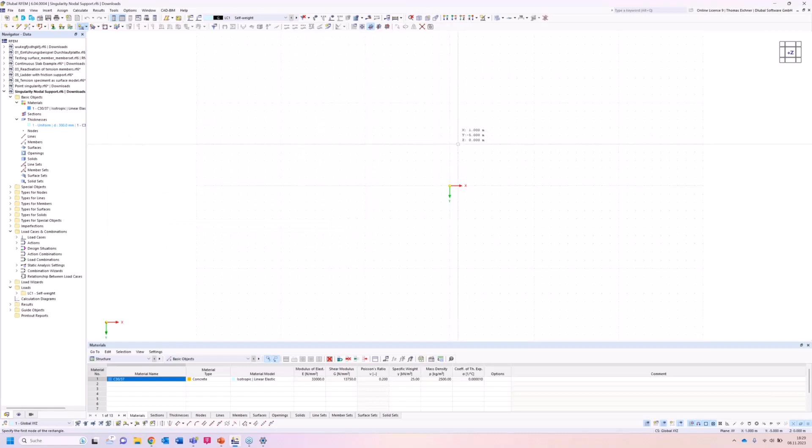Now we will create again a surface, like I said, with the predefined ones from the last model, and go this time for 8 times 4 meters. Now we will also add the location for the nodal support, and this is gonna be at 2 times 2 meters.

Next thing is we will create a line support on the right side, and then we will create a nodal support in the middle. So I will go for this line support right here, and the nodal support right here.

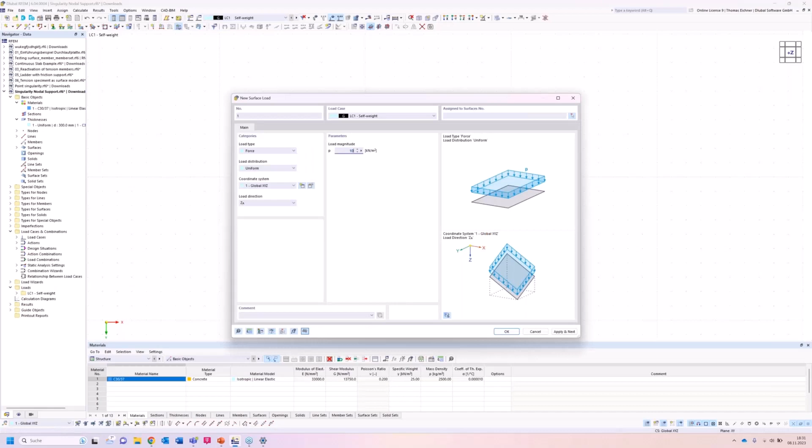Okay, it's not really seeable, so I will adjust the size for a bit now. Okay, for forces we're just going to be simple and take again 10 kilonewton per square meter on the whole surface. Looks all right already.

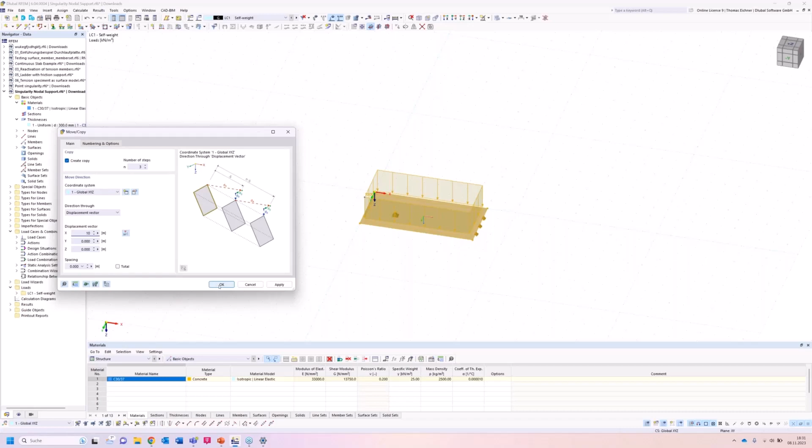And then it's time to copy it again. So this time we're going to select everything and just right click here. Then we can go on the manipulation, there we can see our move and copy button. We'll do it and just create 3 copies again in, I think, 8 meters for this again, so we make 10 meters again. And we're ready to go.

So now, as always, 3 more simple steps. The types for surfaces with those surface mesh refinements. I will just do this real quick: 2 meters, 1 meter, 0.5 meters, and 0.1 meter. The assignment to the surfaces.

So we have our surface refinements and can go on with our special object of the results section. It's exactly the same section as in the previous models.

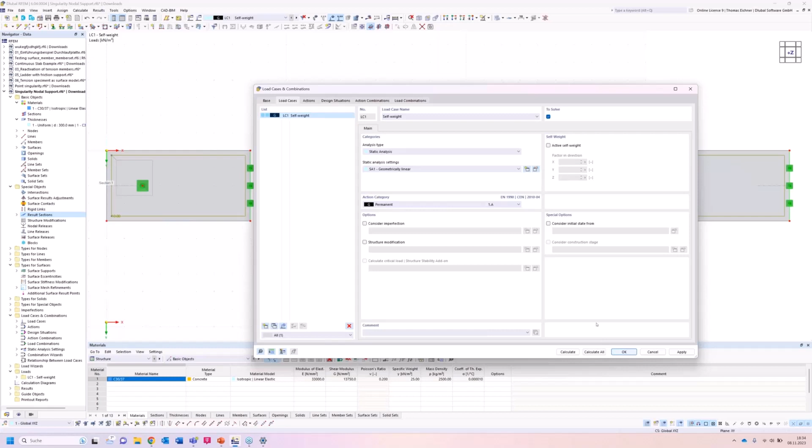So we can calculate it now. And then I will go in the other direction again. Well, it's way cooler with this button. And I want to have the local extremes as values again.

So the first model was garbage all the time, because you see just one element on the left side, 3 elements here. It's just not enough, so we can ignore this. For deformations, it seems like the singularities are not really there, so singularities do not really affect deformations in this case.

There's also a different method, as mentioned in the beginning. We are now working with the deformation method. If you take the other method, the unknowns are not deformations, but forces, so also the singularity meaning changes. But right now, for most programs, almost all programs, you will have the problems in internal forces.

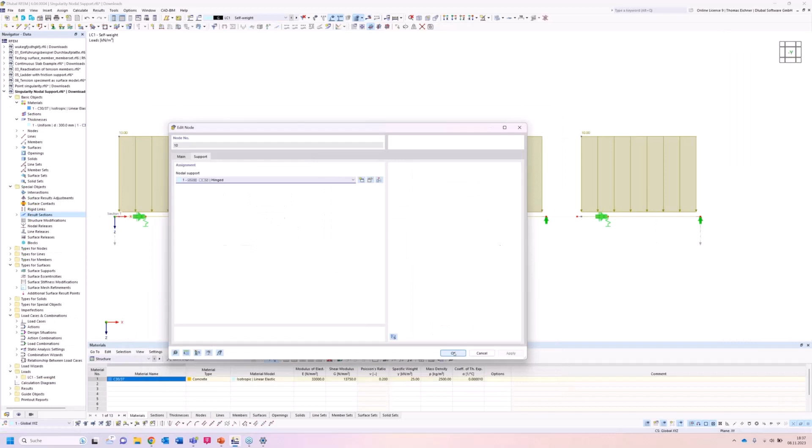So I know the result already. I will just go for 700, because for this model it doesn't matter. It doesn't really matter, it makes just a small difference, the value in here. I will go for apply. Also, we see already our nodal support changed into a spring in Z direction. And then we can calculate it.

So now we're back here, and we can see, yeah, it didn't really help, right? The problem with this kind of help is if you want to use like springs, there shouldn't be a defined, what's it called? Statically...

...defined system. Right here, we have a line support here, so this surface can freely rotate around this line. The only thing that stops this surface is our nodal support. That means whatever we do to this nodal support, it has to take everything, so the force can't go somewhere else.

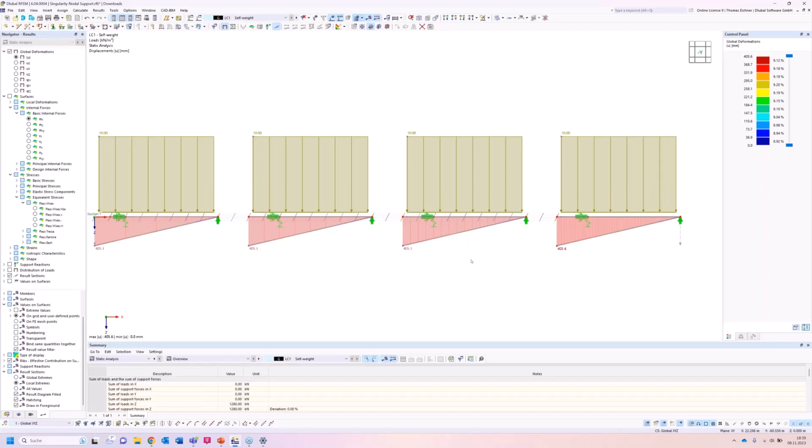The only different thing now should be this, you can see this here. This is now the deformation. That means this one goes 40 centimeters, it moves 40 centimeters downstairs. And we don't have this belly in here, so it means it takes all the force again, but it deforms differently.

Since we have a very small spring constant right here, 700 kilonewton per meter, we could also calculate it, I think. Just taking the support reaction divided by this, and then we have the deformation at this place in the end. Okay, so for this case, it won't help.

For bigger systems where you have walls, and especially if you have a combined system of columns and walls, and you have modeled your columns as fixed, then you will have lots of singularities. So in practice, for especially reinforced concrete, sometimes for mid-size models, you would create two models: one where the columns are stiff, and one where the columns are springs, kind of. And then you have two extremes, and then you would do some constructive thinking on where in between your solution would be expected.

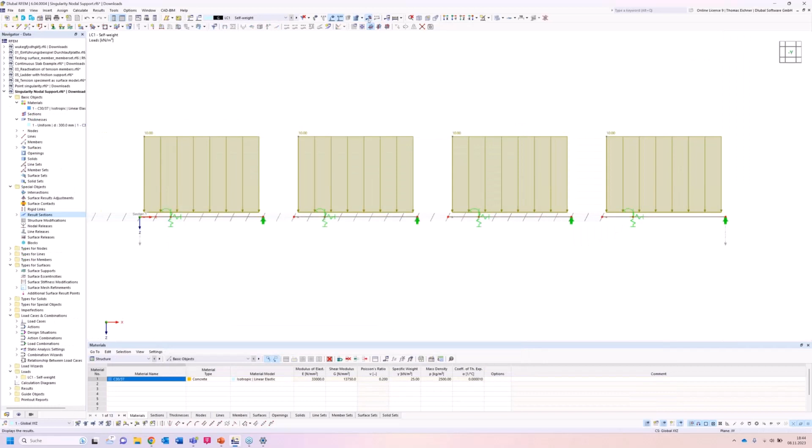Especially for reinforced concrete, you design with the moment at the end of your column, so exactly this one. Generally, you shouldn't calculate with this, if you have a cantilever like this one on the left, you should take the moment in the middle. So for cantilever, this option would not be the best one. You could go a different way by using one of the other options here, like these two. But for this case, we will just say that's not a cantilever.

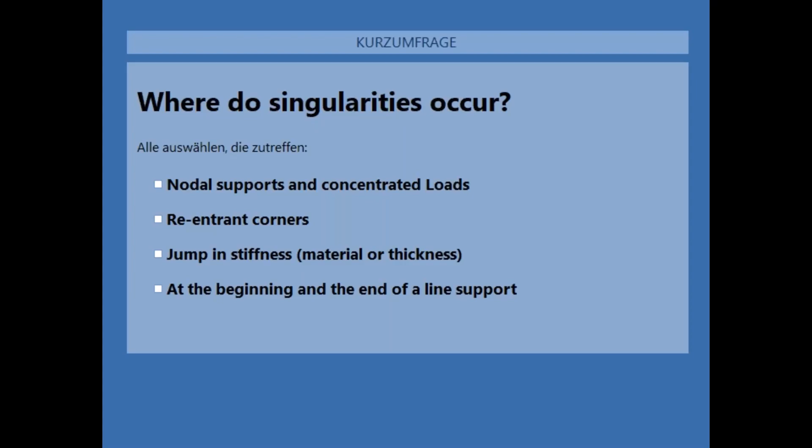Okay. I will close the vote and show the results. So in this poll, everything was right again. Singularities can be at re-entrant corners, so corners of two walls which come together, nodal supports and concentrated loads. We just made two models for this.

Then also in a jump in stiffness, material or thickness. Yes, it's just a jump in this. I mean, we had in the beginning this formula k times u, and it's just a jump in the k. So it's a jump in the equation. So there will be something strange.

And at the beginning and the end of a line support. Yeah, because in the direction of this line support, at the end of the line support, it almost acts like a nodal support. Yes, so that was the last poll here.

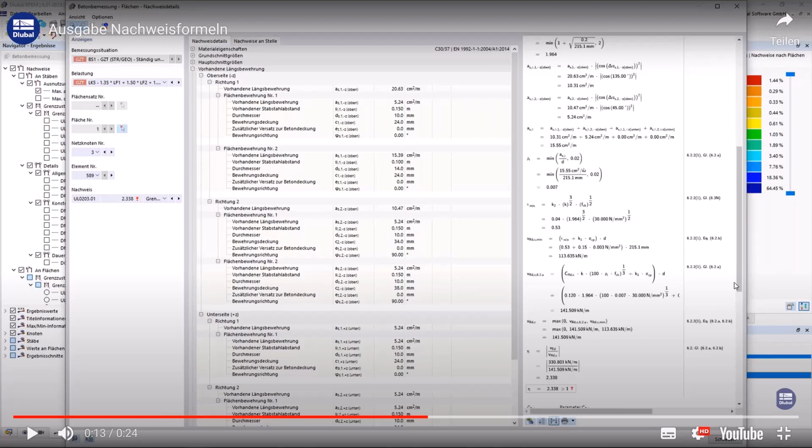because in many cases in the tests or the given results of the tests, you only have the end result, right? And with this, you can try to figure out where you did the mistake. And that's new in RFEM 6, and it's really great. So you can just use this in your everyday study.